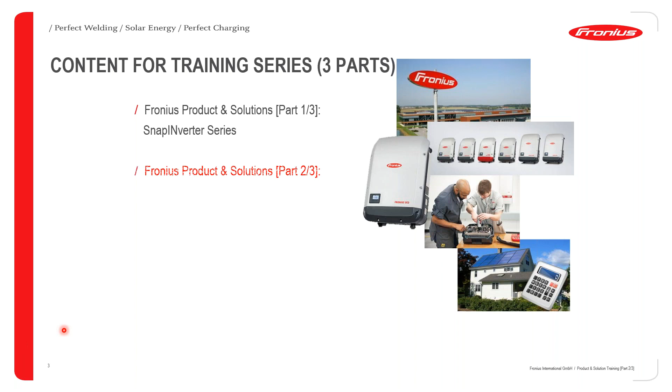So if you joined us for part 1 out of the 3-part series, part 1 did focus on the Fronius product and solutions, and it did cover the SnapINverter series. Today we will be discussing part 2, which will give a core focus to the monitoring options. And next week Thursday we will be covering part 3, which will give a focus on the hybrid and off-grid solutions from Fronius.

Today's agenda: we will start off with the Fronius Smart Meter, and we will then move on to the Fronius Sensor Card, cover the Fronius Datamanager, which is our communication card. We will then have a look at the Fronius internal communication, which is called Solar.NET. We will then also have a look at energy management using Fronius SnapINverters. We will then move to the Fronius Solar.web, which is our monitoring platform, and then discuss the Fronius Solar Configurator, which is our design tool.

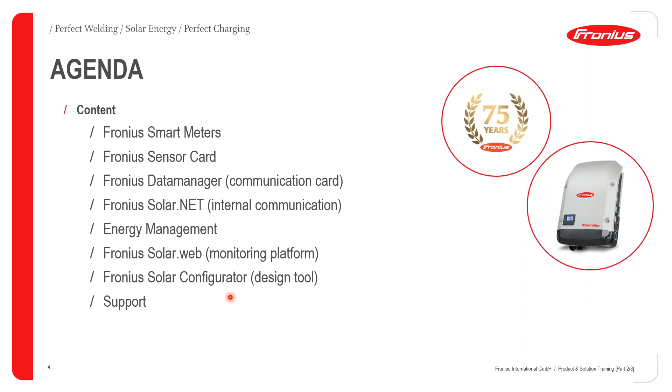And we'll also show you why Fronius has market-leading support for the industry. After which we will be having a 10-minute Q&A session where we will make sure that everybody's questions that are asked in this webinar will be attended to.

We shall start off with the Fronius Smart Meter. The core function of the Fronius Smart Meter is to do energy profiling, and this is to give an overview of consumption and production. It also provides the basic data for analysis, and it also provides an online visualization of the entire system.

With the Fronius Smart Meter, we have the old version, which was the Fronius Smart Meter that was on the market. This old version will now be replaced by the new Fronius Smart Meter, which I will be showing you a bit later in the presentation. So I think what's important to note is that if you are buying a Fronius Smart Meter, you could be buying the old version or you could be buying the new version, depending on what your local distributor has in stock. The two versions are very similar to each other, but we will discuss the very slight differences that exist between the old and the new Smart Meter.

With the old Fronius Smart Meter series, we had 3 smart meters. We have a 63 amp single-phase smart meter. We have a 63 amp 3-phase smart meter, which is mainly targeted towards residential use. And we also have the big 50 kiloamp 3-phase smart meter, which was mainly targeted towards commercial use. And another additional feature of the 50 kiloamp smart meter is the need to actually buy external CTs. So with the single-phase 63 amp smart meter and the 3-phase 63 amp smart meter, there's no need for external CTs. You only need to get external CTs when you use the 50 kiloamp smart meter.

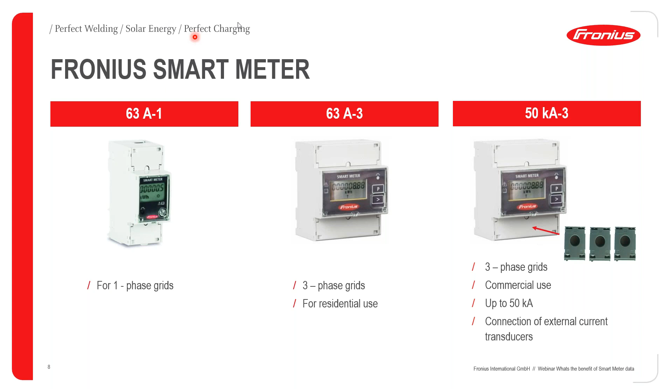We will now be moving on to the Fronius Smart Meter TS, which is basically our new smart meter for the market. The Fronius Smart Meter TS provides the basis for Fronius Solar.web. It allows analysis and visualization of consumption data. It's the key for monitoring and efficient energy flow control. So you can basically see what's going on per phase. And it also is a bidirectional meter, so you can measure what's going to the grid and what's coming from the grid. So basically it can give you consumption and production data.

All the information from the smart meter is sent to our Datamanager, which is found in the Fronius inverter. The Datamanager then sends all the data to our server in Austria, from which you can then obtain the data from Solar.web.

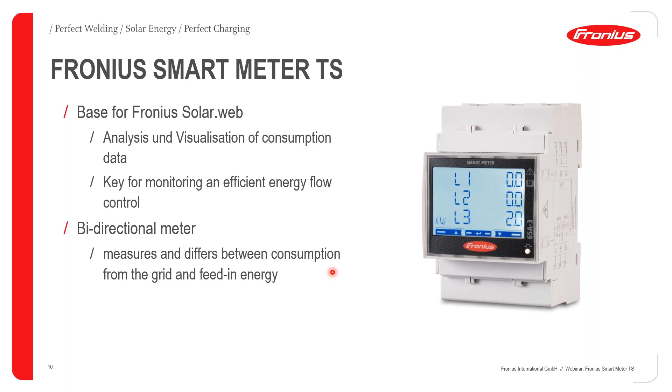For the new smart meter, which is called the Fronius Smart Meter TS, we have 3 variants as well. We have the single-phase 100 amp variant. This is mainly for residential systems for a maximum phase current of 100 amps. It's single phase, and your AC cable cross section can be from 1 to 16 millimeters squared. The 3-phase residential smart meter is rated at 65 amps, and the AC cable cross section is from 1 to 16 millimeters squared.

We then have the bigger 3-phase 5 kiloamp smart meter. This is targeted towards commercial use. It's a 3-phase smart meter. It has external current sensors, and your AC cable cross section can vary from 0.05 to 4 millimeters squared per phase.

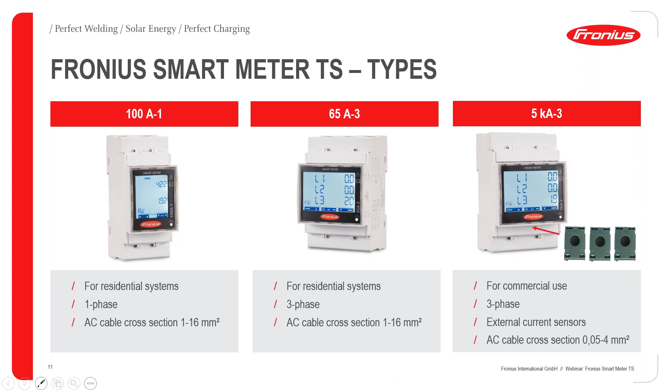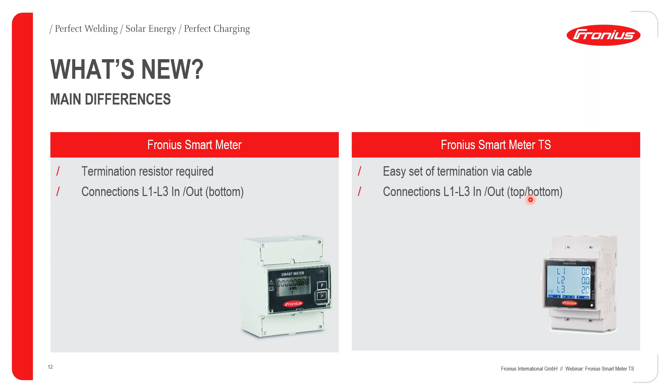So what's the main differences between the old Fronius Smart Meter and the new Fronius Smart Meter TS? Okay, so with the Fronius Smart Meter, a termination resistor is required. With the Smart Meter TS, the easy set of termination is done via cable. For the old Smart Meter, your connections L1 to L3, the in and out are at the bottom. With the new Smart Meter, the connections for L1 to L3 are also located on the top or the bottom.

Okay, that's the difference. And with the Fronius Smart Meter, the old one, your settings are by 2 buttons, whereas with the Smart Meter TS, the settings are done by the touch screen display. So with the old Fronius Smart Meter, in order to go to any new screen, you have to use those 2 buttons to toggle. Whereas with the new Smart Meter, it's completely touchscreen. So it provides a much better user interface.

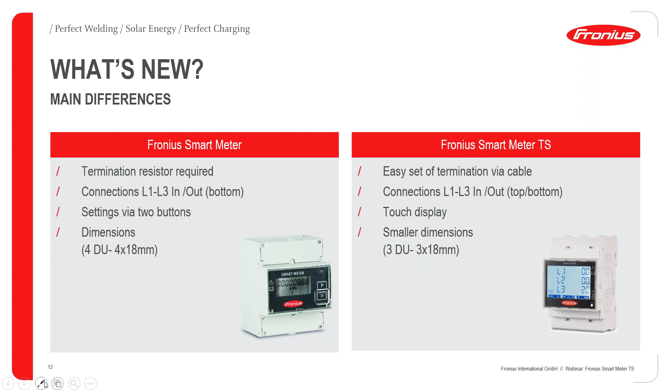The old Smart Meter, the dimensions was 4 DU, that's for 4 by 18 millimeters, whereas the new one is 3 DU, and that stands for 3 by 18 millimeters. We will now move on to the installation of the single and 3-phase Fronius Smart Meter TS meters.

With the first 65 amp 3-phase Fronius Smart Meter, the cabling will look as follows. You will have L1, L2, and L3 coming in on the top of the smart meter. You will then have L1, L2, L3 exiting on the bottom of the smart meter. This is for the 3-phase 65 amp smart meter. Your feeding point, your neutral, will be across those terminals, and you will then have a 315 milliamp suggested fuse from your neutral to the neutral port on the smart meter.

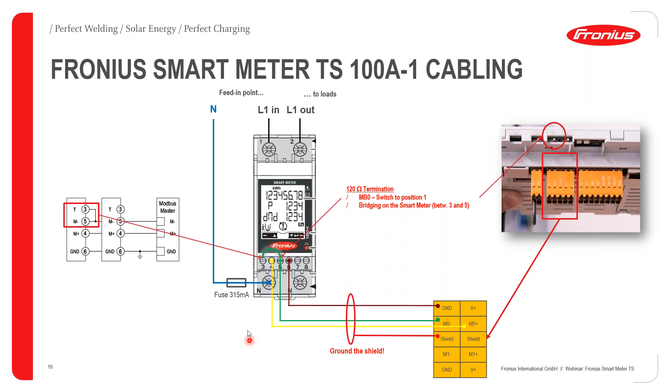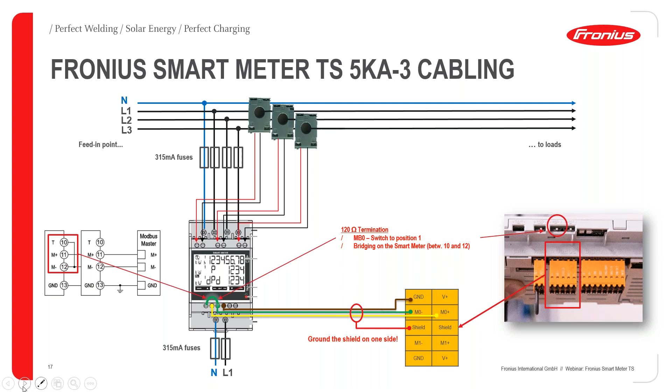With Fronius smart meters, what's very good about them is that you can use more than one Fronius smart meter in a system. The maximum amount you can use in the system is 4 Fronius smart meters. In this scenario, I have one primary Fronius smart meter, and its main focus is to measure what's going to the grid and what's coming from the grid, and also to set any zero feed-in limitations. So if you are in a municipality that has zero feed-in or partial feed-in limitations, you can change the feed-in limit on the Fronius smart meter from 0 to 100%, in order to control how much excess power you are sending to the grid. But in order to do this, you need to install the Fronius smart meter in combination with the Fronius SnapINverter.

You can also install secondary meters, and this is very useful if you want to do energy profiling. You can install a maximum of 3 secondary meters in a Fronius system, and the core task of a secondary smart meter is to do energy profiling. In this scenario, I have a heat pump, which is a very big load, and it can be very important to monitor how much this load actually pulls throughout the day.

If you also have another integrated small scale embedded generation in your PV system, such as a wind turbine, this could become useful. As you know, it's not advisable to feed in power from a PV inverter to a wind turbine, as this can damage the power electronics in your wind turbine. Hence it's very important to install a secondary Fronius smart meter in order to set a feed-in limitation, to prevent any power from going to your embedded generator.

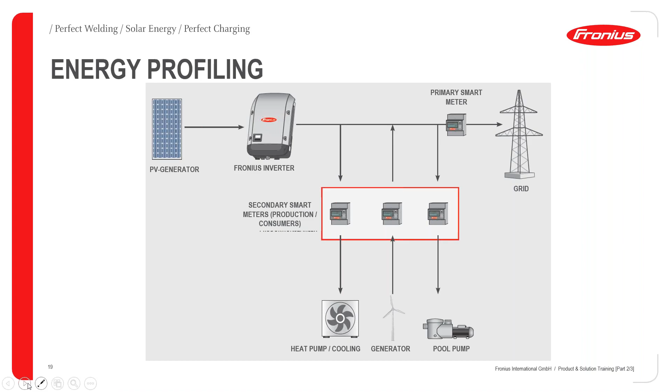I will now be moving on to the Fronius Sensor Card. It comes in either a card version or a box version. What I have displayed on the screen is the card version. With the card version, you can mount it internally in the Fronius inverter. If you purchase the box version, you mount it externally.

Both have the same core task, and that is to connect different sensors. Basically, the sensor card will connect the data from all the sensors and send this data to the Datamanager card, which will then transmit all this data to Solarweb, where you can view it online. You can connect up to 10 sensor boxes or sensor cards in a system, and as I mentioned, you can get this in a card version or a box version.

You can connect different sensors to the sensor card. The type of different sensors you can connect is what I've displayed on the screen. You can obtain all these different sensors directly from Fronius.

The first sensor on the top right is a voltage sensitive input for irradiation. What I have on the top left is your temperature input, a PT1000 temperature sensor. What I have on the bottom left is a wind sensor. And what I have on the bottom right is a surface temperature sensor, such as a module surface temperature sensor. Using these 4 different types of sensors, you can get a very good overview of the PV system.

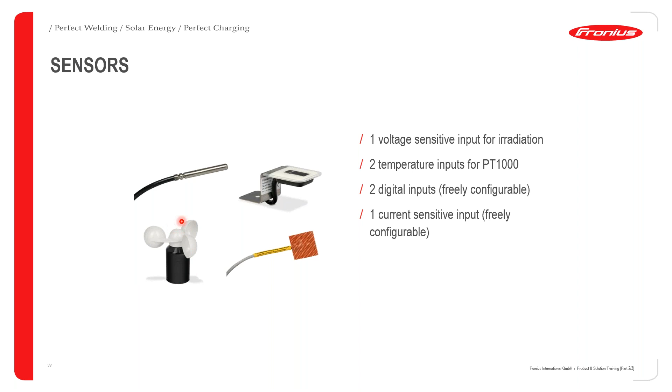These sensors will submit all their data to the sensor card, and the sensor card will then submit all the data to the data manager, and the data manager will then send this information to Solarweb. You can then log onto Solarweb and remotely access all the data from your sensors.

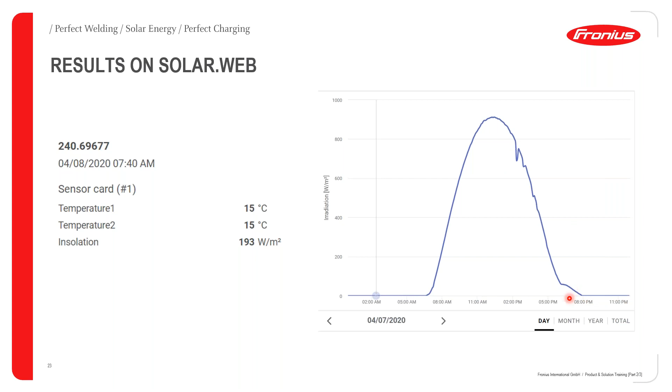They were both 15 degrees Celsius, and the irradiation at this time of the morning was extremely low at 193 watts per meter squared. Using Fronius Solar.web, we can plot a graph for the day. As you can see throughout the day, approaching 12 o'clock, between 12 and 1, that's where your max irradiation occurs. As we go later through the day, the irradiation will then decrease. As you can see, the sun sets pretty late, at about after 6pm.

I'll now be discussing the Fronius Datamanager, just to give you a very brief overview.

The Fronius Datamanager is basically the integrated communication card found in Fronius snap inverters. You get two versions of Fronius snap inverters: the Fronius SnapINverter Light, and the Fronius snap inverter which has an integrated data manager inside already. To tell whether a Fronius inverter has a data manager or not, look at the naming. If the Fronius snap inverter has Light at the end, the data manager is not integrated, you've got to buy it separately. If it does not have Light at the end, the data manager is integrated.

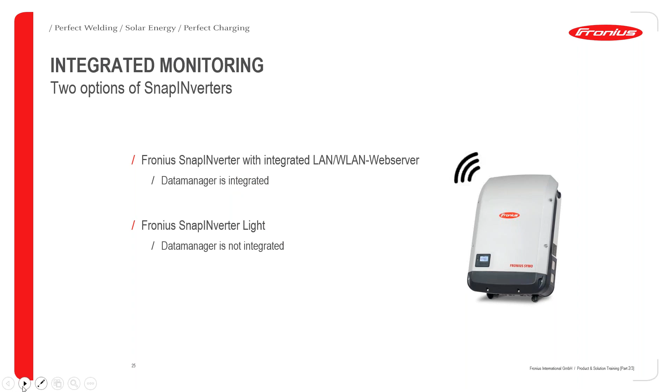With the Fronius Data Manager, it is a plug-in card. It includes a data logger, a web server, and a Wi-Fi card, all integrated within the data manager itself. That's an old screenshot of how the data manager looks. We can get it in the card version, which is basically a retrofit kit inside the snap inverter, or you can get it as the box version, which is an externally powered box.

You can monitor up to 100 inverters with the one data manager. So if you are doing a very big commercial installation with, let's say, more than 20 inverters or 10 inverters, you only really need to get one data manager.

With the data manager, it will collect all the information from the Fronius inverters, and it will then transmit this information to our Solarweb portal, to our Solarweb app, as well as to Fronius Solar.tv web-based user interface.

It has various open interfaces, such as Modbus TCP for your Ethernet connection. It also has Modbus RTU Sunspec for any RS485 communications. It also includes your Fronius Solar API, which is your internal Fronius communication language, and ports for the Fronius smart meter via the RS485 connection points.

It also includes energy management outputs. You can basically connect up to 4 external relays to the Fronius Data Manager, and when a certain power threshold is reached, those relays can now be triggered.

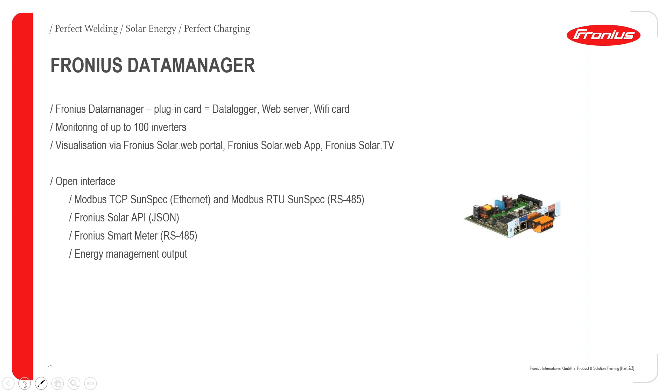The signal inputs could be for an external alarm. You can trigger an alarm to go off when, for example, a certain power threshold is reached.

Port 1 and port 2, that's your Fronius Solar Net in and out communication ports, for your Fronius internal communication. So if you have more than one Fronius inverter, let's say 3 Fronius inverters, you'll basically go from the out of the one Fronius inverter with a Cat5 connection to the in of the next Fronius inverter Solar Net in communication ports.

You then have port 4, which is your potential-free relays. You also have port 5.

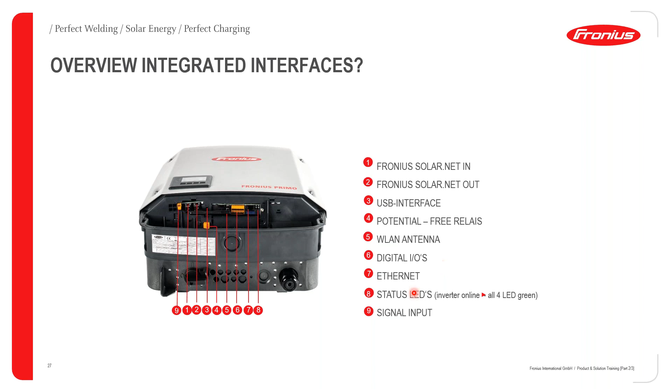This could be a trigger coming from an energy meter, such as the overvoltage protection. Port 1 and port 2 are your connection points for SolarNet, to communicate with another Fronius inverter. Port 3 is a USB interface, which could be for USB logging, but can also be used for any USB updates.

What's very important, if you are going to be doing USB logging, please make sure that you insert a USB into the inverter before you start the logging. You can't go to sites and then install a USB to get past history. That is not possible. The USB has to be installed inside the inverter from day one in order to get logging from day one onwards.

Port 4 is going to be a configurable potential free contact, and this again can be used for energy management. It can be connected to a power meter as an example, or it could be connected to any signal relays.

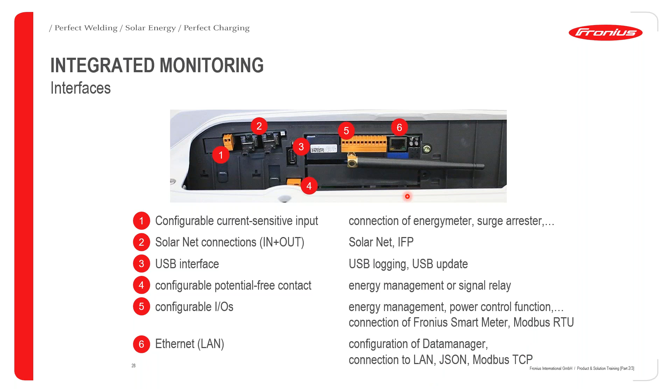Okay, I'm now zooming into the Fronius Datamanager. What you can see here is your wireless local area network antenna.

You can then see your Modbus termination switch. For the Modbus termination switch, you get position A or position B. One of the positions gives you an assigned IP address, whereas the other position gives you a predetermined IP address.

That's going to be your LAN Modbus TCP connection point via Ethernet connection. And then the next port is going to be an IP switch.

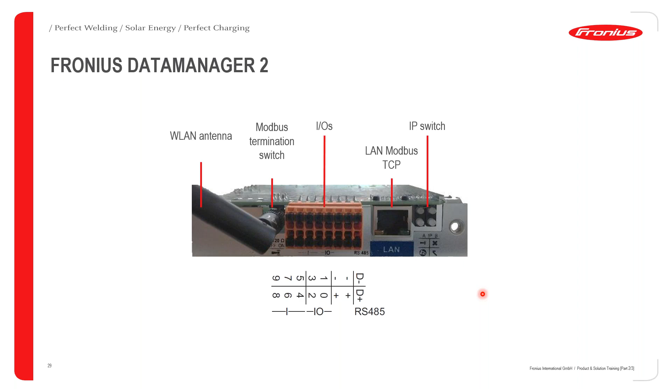That will pretty much toggle between position A and position B, which will give you either a predetermined IP address or an assigned IP address. I think I made a bit of a hiccup at the beginning where I mentioned that was the Modbus termination switch, and that was incorrect. This termination switch over here will either switch on the 120 ohm resistor or switch it off. And the IP switch will toggle between an assigned IP address and a predetermined IP address.

Please note that on the Fronius Datamanager, you get two switches, and you also get a third switch, which you can't really see in this picture, but the third switch will basically switch the Datamanager on or off.

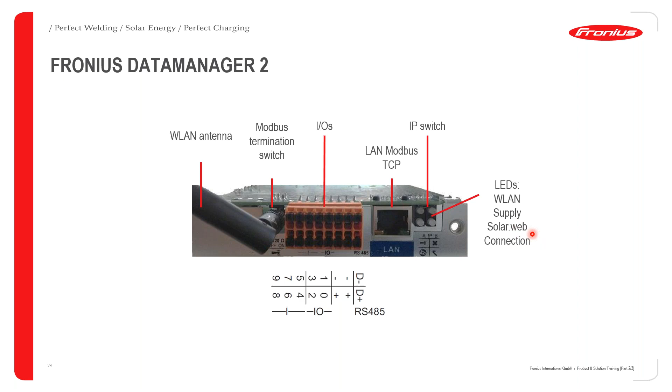These LEDs will basically display your different connection statuses. They can display whether you are connected to a wireless local area network successfully, whether you have the correct supply, or even whether you are correctly connected to Solarweb.

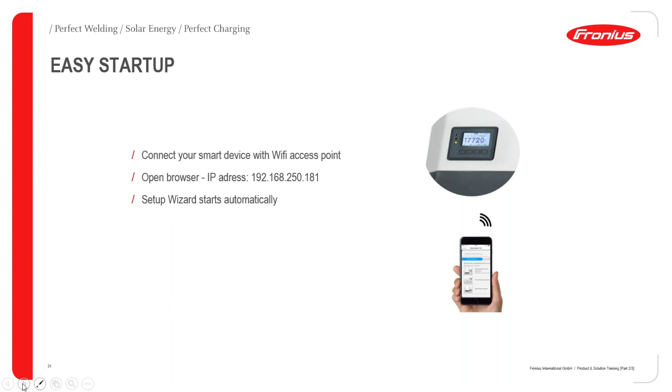The next way to do the commissioning of the data manager is through the normal procedure, where you activate it in the setup.

When you go to the display of the inverter, the SnapINverter, you go to the setup section of the inverter and you activate the wireless Wi-Fi access point. So once you access that, you will see the ID of the wireless that you are accessing, and it will be Fronius 239-, and this number here is actually a representation of the data manager ID for that particular

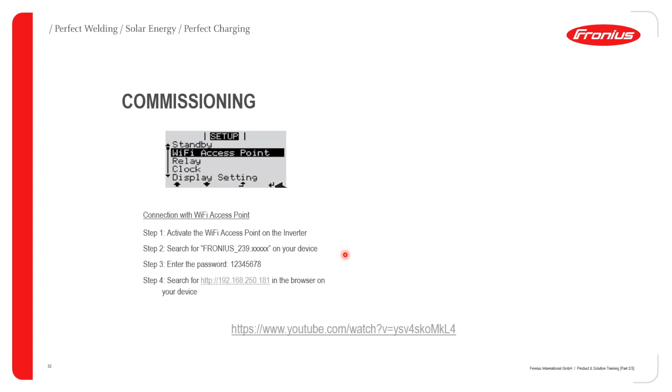inverter. Then you of course enter the default password, which you can see here, and then enter the same IP address as I had mentioned before. That is 192.168.250.181, and then the setup wizard will start up. So when the setup wizard starts up, with the WPS function, you are also able to automatically connect your inverter to the wireless internet, and therefore continue with your configuration.

For a more detailed look into how the data manager is being commissioned, please visit YouTube, and on this link you're going to get a very clear illustration on how to commission the data manager card.

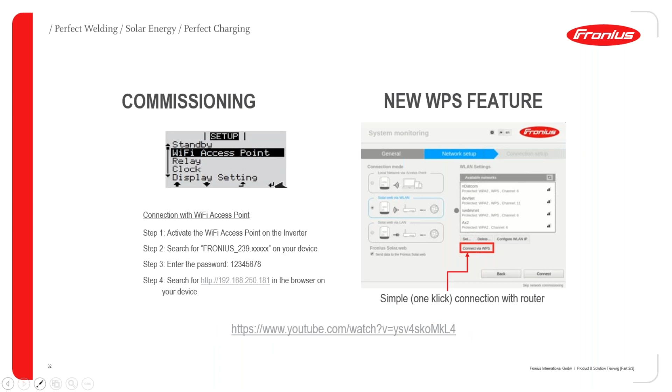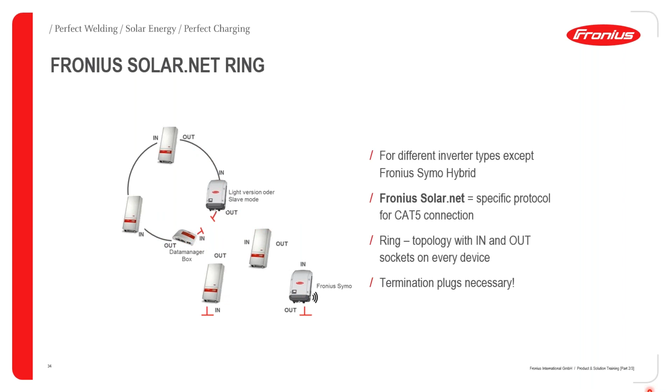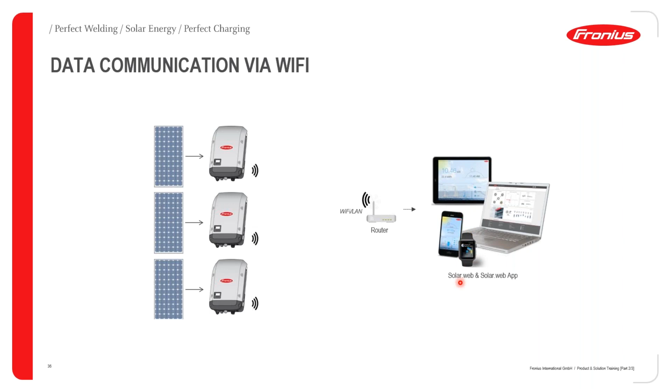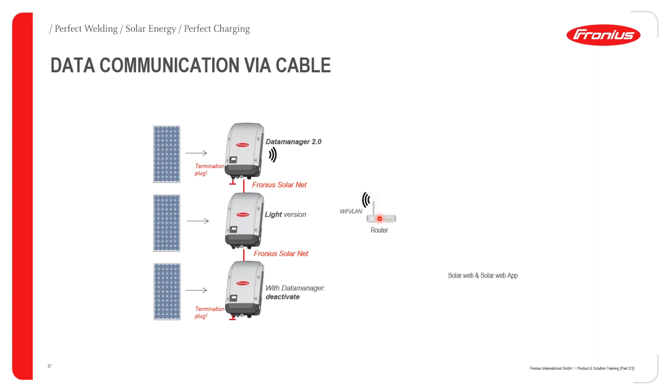The next variation is where you have one inverter here with a data manager card, and therefore this is your web server in this inverter. And then all the other inverters in your system could be up to 100 inverters or so. Then, as my colleague has mentioned, we recommend that you divide every 20 inverters to connect to one data manager. And therefore, each constellation of 20 inverters here could be connected to one inverter with a data manager. And these are either feeding through a LAN cable or a Wi-Fi network into your router, and then transmitting this data into Solar.web similarly for monitoring.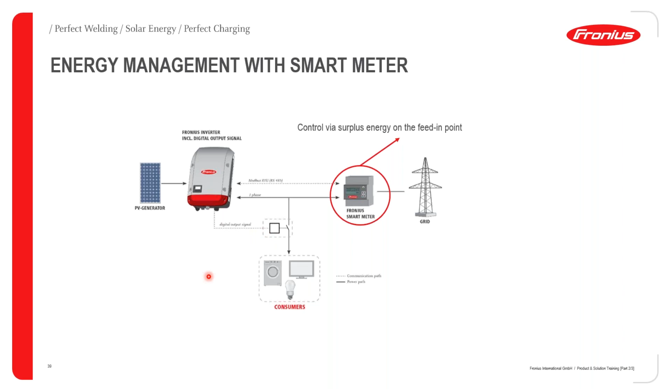Going further, let's look now at energy management, because when you go to Solar.web, energy management becomes part of the reason why you need to have a monitoring platform, because you can see if there is any potential for you to make use of excess energy in your system. So for you to be able to make use of the excess energy, of course, you require a smart meter. My colleague has already talked about how to commission and install the smart meter. So the smart meter is basically checking at the feeding point what is the surplus energy available. So if you have any surplus energy available, then you can decide if you want to include other loads through the digital inputs and outputs for you to be able to activate other external loads.

The digital outputs on the data manager, I think, have already been covered. If you have an older version of the data manager, or if your system was installed a couple of years back, you need to do a software update for that particular data manager for you to do the digital loads management. And of course, the loads can be anything from a pool pump, air conditioning, and so forth, or even charging of an electric vehicle.

So anytime you have excess energy through the digital IOs, then you can choose, depending on the threshold which we are going to look at next, at which point you want to activate which load. So when you go to the web interface settings of your web setup wizard, then you go to the section that says IO mapping. Then in IO mapping, you can activate positions 0 to 3. So those are 4 positions. And these positions are basically limited.

Also, if you are talking about how many smart meters you can have in a system, you can have a maximum of 4 because the Modbus addresses are limited to 4 in the data manager card. But depending on the availability of excess energy, you can configure the loads or the relays to activate based on priority. So load 1 could have a lower threshold of starting, then the next load depending on the next portion of excess energy available, and so forth.

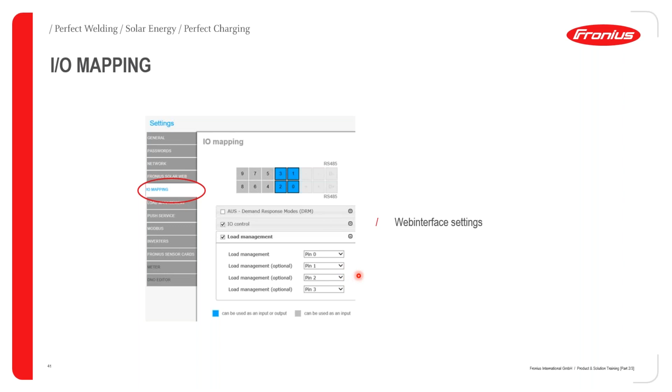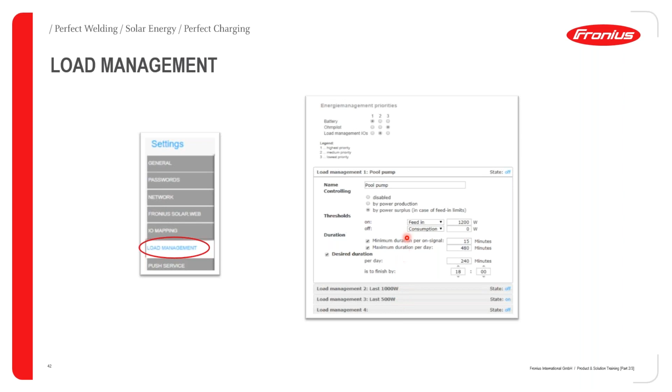And once you have all this data available, then you come into Solarweb, and you're going to be able to monitor all your data and see if there are any possibilities of improving your system.

So before we go on, I would like to launch a poll just to get an idea of how familiar you are with our monitoring devices. So the poll is, which Fronius monitoring devices are you familiar with? So kindly give us your feedback. We would like to see how familiar you are with our devices, so that if you have any particular questions or needs that need to be addressed, then we can figure out how much information we should be giving you for the concerned device. So I will leave the poll on for the next 20 seconds or so, and then after that, I will be sharing the results with you. So kindly take your time and give us your feedback. It is very much appreciated. Okay, so I see quite a good number of you have already voted. So I'll be closing in the next 5 seconds, and then share the results with you.

Okay, so as you can see, quite a good number of our attendees today are familiar with the Data Manager card, and that's very good because, as I said, the Data Manager card is actually the central part of the monitoring platform, because without data being sent to the monitoring platform, you have no data in Solarweb to monitor. The smart meter and the sensor card all have to go through the Data Manager card to be able to see their data in Solarweb.

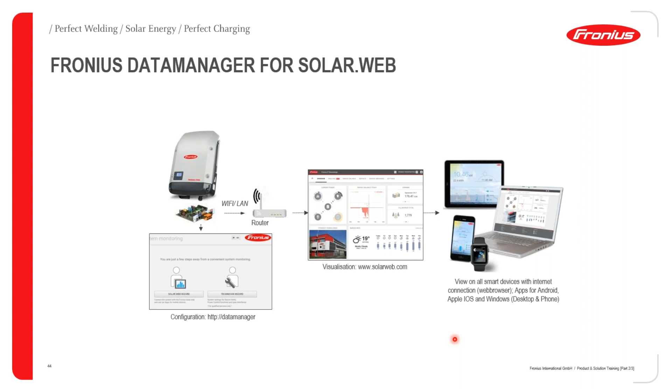In terms of accounts, there are 3 basic ways to access Solarweb. Number 1 is what we call the free version of Solarweb, which will always be free. And in this account, which is free, you get basic system data for the last 3 days.

And then you have a premium version of the Solarweb account where you get more detailed personal reports, including performance graphs. And you also have access to all archive data for your system. And this is not limited. You can go back as far as even 10 years with this archive data when you have a premium account.

That notwithstanding, if you are a completely new installer with no experience with Solarweb, or you have no system running that you can say, I have an account that I can create for this system, we have a demo account within Solarweb where you can see quite a number of active systems and then be able to interact with Solarweb to see how it fits into the operation and monitoring platform.

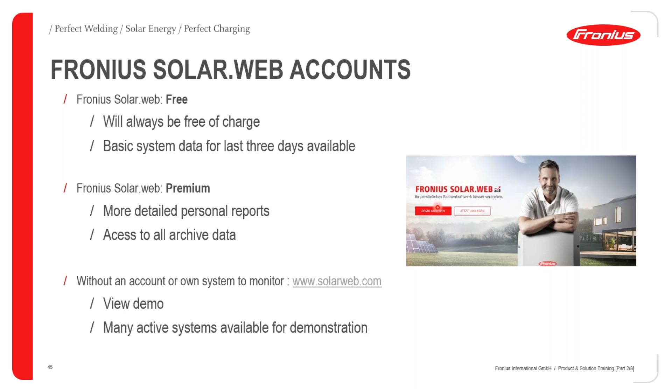So simply going to your web browser and typing this address here, that is www.solarweb.com, you're able to access the Solarweb platform, and here you can access a demo system for you to view. When you go to Solarweb proper, then you can see this kind of information displayed.

So in this kind of system, for instance, we can see that we have a production of about 2.85 kilowatts. This is your solar PV. And you can see here the solid color is showing you the percentage of production. So this is just about half of the installed capacity of this system. And you have another bigger portion here that is not being utilized or is not producing power for you at this moment. And this could be because of overcast conditions or things like that. But by clicking any of these charts in Solarweb, you're able to get such a detailed overview.

In this particular screenshot, what we can see here is that the battery was being charged with 2.28 kilowatts of your PV production and the state of charge of the battery. In some instances, of course, you don't have a battery in the system, so the distribution will be between your PV production, consumption, as well as what is being fed into the grid, if you have permission to feed into the grid, or what is being taken from the grid. And in this case, we are taking about 6 watts from the grid.

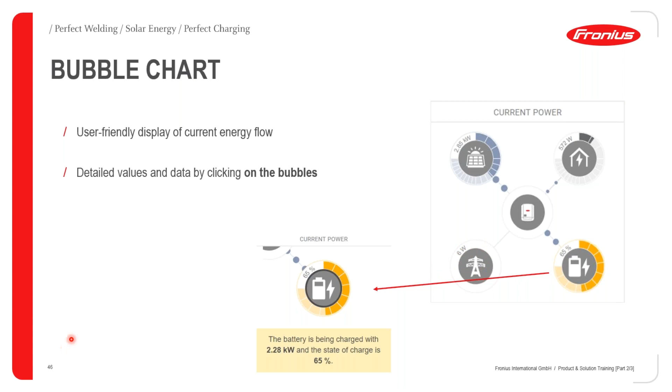Going further, let's look at the system management in Solarweb. So as I've mentioned, you can create just one account for your systems. And if you have, let's say, a premium account with several systems, you do not need a separate account for each of the systems that you have installed. So in this case, you will require only one account, and you'll have a dashboard with all the systems that you have installed. And you can switch from a widget for each system with a photo of each system to a list view of the systems installed.

Additionally, you can export this data in CSV format into your laptop or computer for monitoring. Error messaging can also be done. As you know, the Fronius inverters are from time to time sending you state codes, and you are able to get an email depending on the frequency of the state codes.

In addition, you can compare the production. If you have more than one inverter in the system, you can compare the production from one inverter to the next. And if, for instance, the orientation of the modules or the solar panels is the same, you are able to identify if one inverter has an issue because it's underperforming. So Solarweb becomes a very important part of your fault diagnosis.

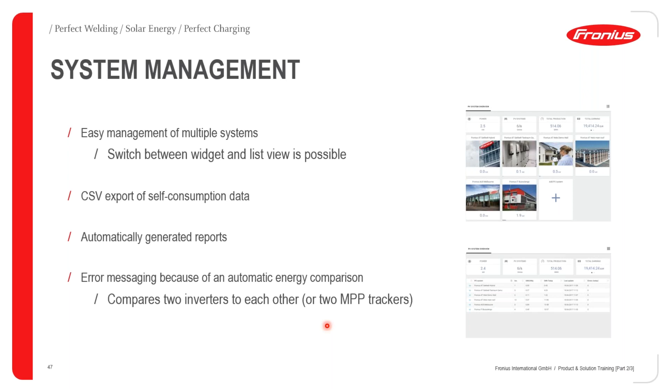In addition, you can do comparison at MPPT level. So in this graph here, when you look at the production, hoping you can see the figures, you have one part of the curve here that is in red, and then another one in blue here. So these are the production from the 2 MPPTs, because for all Fronius SnapINverters except the Eco, we supply them with 2 MPPTs, and therefore you are able to compare each MPPT and see what is the performance, and then the two will give you an aggregate of the total production from that particular inverter.

From those 2 MPPTs, in this case, we can see they are nearly balanced at 8 point something, giving us a total of 16.92 kilowatts. And this is an example of a Symo 20 inverter here.

What else you can see is the possibility to do a remote software update for your system. So if you require to do an update of your system, or updates are actually available, all you need to do is to go to Solarweb, and you can see a list of your components that are installed for that particular system or installation, and you can see right away if there is any available update. So all you need to do is to activate the update remotely. The only condition is that the inverter must have a very good internet connection for the update to complete.

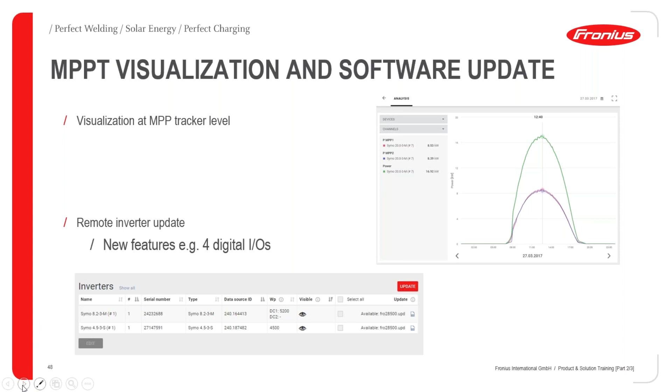And this data from the sensor card is actually quite useful because it can help you to do what we call performance ratio comparison for all your installed systems.

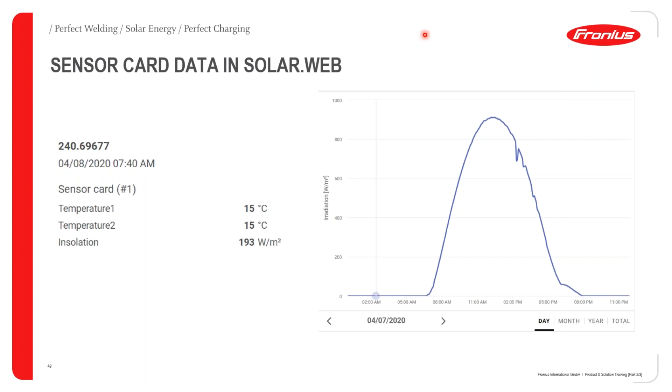Let's proceed and look at also the Solar TV, which is also another possibility for monitoring your devices. So other than just going to Solarweb, you can have a Solar TV installed right in the comfort of your office or the front area of your office, where you can see critical data from your system. And this can be either daily data, monthly, or 7 days data. So in this particular case, we are looking at a screenshot that has data for the last 30 days. So you can see how your system is behaving.

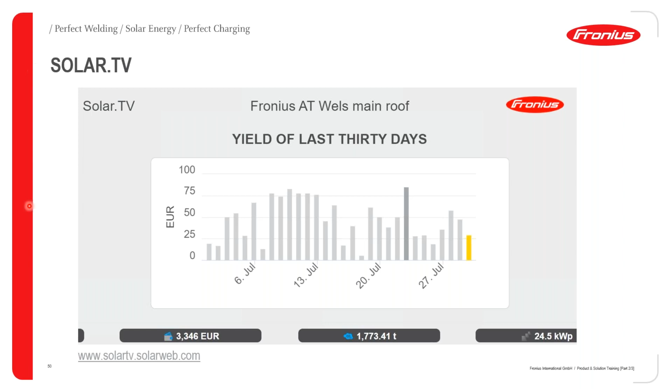And then here you can also see the carbon saving and stuff like that, and the total utilization of your system. And this is a very nice way to captivate your customers when they visit your offices, to see some selected sites that are already working for you and using a very good monitoring platform from Fronius.

The other key function of Solarweb, other than just monitoring your devices, is that it allows you to register for warranty extensions. As you may know, the standard Fronius warranty, depending on your market, is 2 years warranty when you get the products shipped to you. But you have the possibility to extend the warranty to 5 years or up to 15 years, depending on requirement. And this has to be done within the Solarweb platform, where you go to register product and then you fill in the requested details. And then if you require an extension of warranty, you basically go to Solarweb shop, where you can extend the warranty by purchasing.

So when you purchase a 5-year warranty extension, you will get a zero figure invoice. So that does not mean you're paying us anything. It's just an invoice that needs to be produced from the web shop. And after that, you can basically print a PDF certificate of that warranty extension for your device.

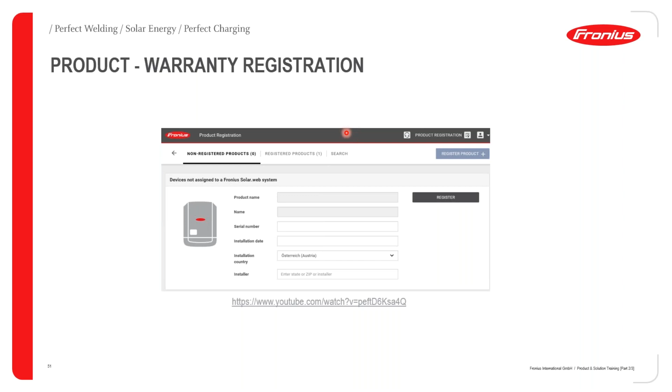Another key function of the Solarweb monitoring portal is the fact that it has a solar configurator tool embedded, and this basically allows you to design your system optimally. As you know, we have recommendations on the string lengths, what is the maximum allowable voltage on the DC side to be connected to the inverters. And therefore, using the solar configurator, you're able to determine if your design is within those limits.

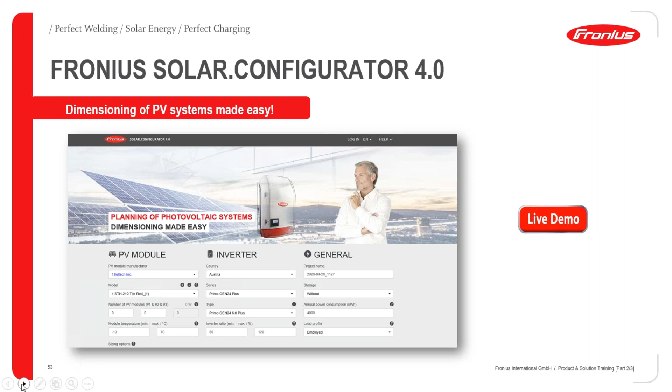So this is the dashboard, so to speak, of the solar configurator, which is your design tool provided for free by Fronius. So even when you don't have an active account with Fronius, you can go to the Solarweb platform by typing Solarweb.com, and you access this solar configurator free of charge. And as you're going to see next, there are quite a number of things that you can design using the solar configurator.

Number one, you can look at the module requirements or the specifications. We have quite a number of module manufacturers who are listed in solar configurator with models, and here you also can specify the number of modules you're working with, as well as the module temperature. We have all the Fronius inverters already integrated, and depending on your country where you want to install the system, the configurator can also recommend which inverters are ideal for your particular market. And lastly, we also have the possibility to integrate storage in the solar configurator, as we see next.

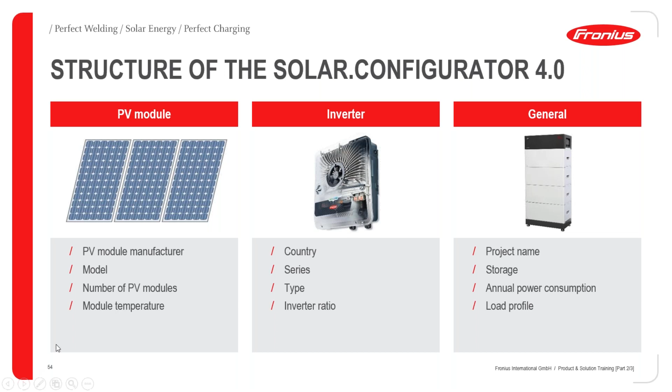So basically the module, as I've said, you can select here quite a number of module manufacturers, and then the exact series of the module that you're going to use, and you can specify also here the number of modules that you want to integrate into the system. The moment you enter the number of modules, the system automatically works out for you what is the installed kilowatt peak for that particular selection.

Lastly, you have to specify the temperature ranges that you're going to work with, the minimum temperature and the maximum temperature. This is important for the solar configurator tool to know the expected maximum and minimum open circuit voltages of your panels, and to check if these are within the limits of the recommended connection voltage on the DC side to the SnapINverters.

Next, we look at the inverter selection. As I've mentioned before, depending on the country where you want to install the system, you basically have to choose a country here, and all the available or recommended inverters for your country will be available for selection as well. And then you specify the inverter ratio, meaning you have the possibility for the system to determine, out of your selected PV module connection, the ratios in terms of the maximum connected PV power.

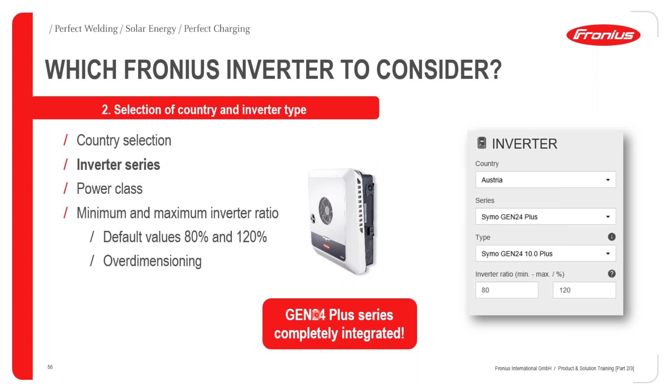As you know, with all Fronius inverters, especially the SnapINverter series, there is the possibility to oversize your system with up to 200% in some cases for the Primo series of inverters. And what I'd like to mention here is that our upcoming Gen24 inverter, which is the hybrid version of our SnapINverters, is fully integrated now into the solar configurator.

Going further, we look at the general area of the solar configurator, which allows you to enter your project name, choose whether your system has battery storage included or not, and then your projected annual power consumption and your load profile. So load profile here says employed or family.

When the system says employed, it basically means that a lot of your available PV is not fully utilized during the day, and therefore if you integrate a storage system, you're able to use the PV energy produced during the day at night from your storage. If you have a family setup, it means you do not have too much available energy for storage, because a lot of your activities are probably happening during the day, and maybe a lot of your family is at home during the day. So you are making nearly 100% utilization of the available PV energy.

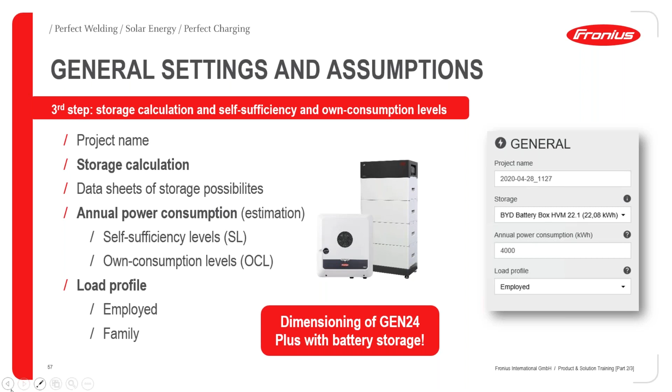So that brings us to how you can get support from Fronius. At Fronius, we place particular emphasis on support, after-sales support especially, because this is what ensures the success of our products. So we offer support in three key ways. Number one is through the Fronius system partners, which basically include all our installers. Then you have the distributors or sales partners. With these partners, we are continually giving them expert knowledge on all our products. And when you go to fronius.com, you can also find the Fronius service partner nearest to you.

In addition to that, we also have our technical sales advisors like myself and my colleague Mohammed that are locally and regionally available to interact with all our partners and give them support on any aspects of our products, whether it's design, product knowledge, troubleshooting and stuff like that.

But for troubleshooting proper, we have a key department within the Fronius Solar Energy unit, that is Tech Support International. We also have a hotline where, if you encounter problems on site that you're not able to solve, you're able to call in and discuss what needs to be done with our experts at Tech Support International. And therefore, you get very customized and individual help for any challenges that you encounter with your products.